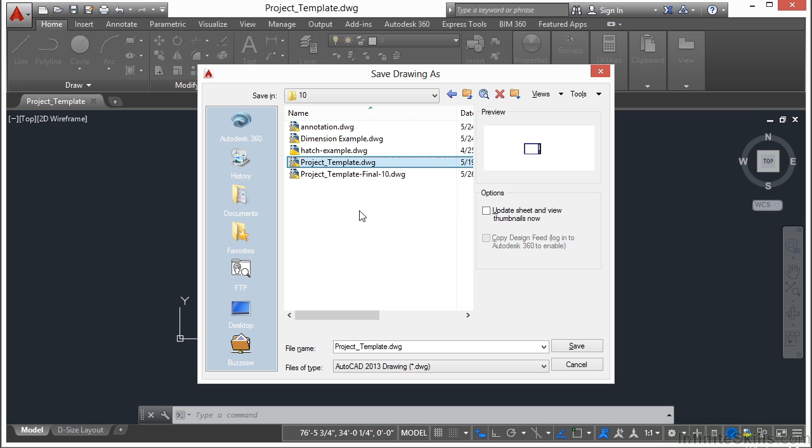So go to Open Files, browse to that folder, look for the project template file. Open it up. Now I'm going to do a Save As because I don't want to override that file. I'm going to override this file that I had started just to make sure I had everything going correctly. This will give you a fresh start, or the same start that I have when we begin our drawing.

If you open up the Layer Manager, you'll see that we have a bunch of layers in here, many of them which we had created ourselves or changed. Now what we need to do is make 3 text styles.

So type in the word style. We're going to make 3 of them: a notes, a header, and a title. Click on the New button, name this one Notes. Click OK. Now let's just go ahead and use the Arial font, regular. And we're going to set the text height to 1/8 of an inch. Let's leave everything else the same.

Click Apply. Now let's make another new one. Call this one Header. Again, we'll use the Arial font. I often use Arial in AutoCAD because it's very thick, it's blocky, makes it easy to read, and being able to read your drawings easily is a must.

A lot of times these drawings are in a machine shop or out in the field on a construction site. They get dirty, they get folded, they get ripped, and the easier the text is to read, the better. We're not looking to make beautiful works of art here. We're looking to make a tool, a guide to create something. So the creation process gets dirty and messy, and so will your drawings. I like the Arial font because of its simplicity and its blockiness. It makes it easy to see.

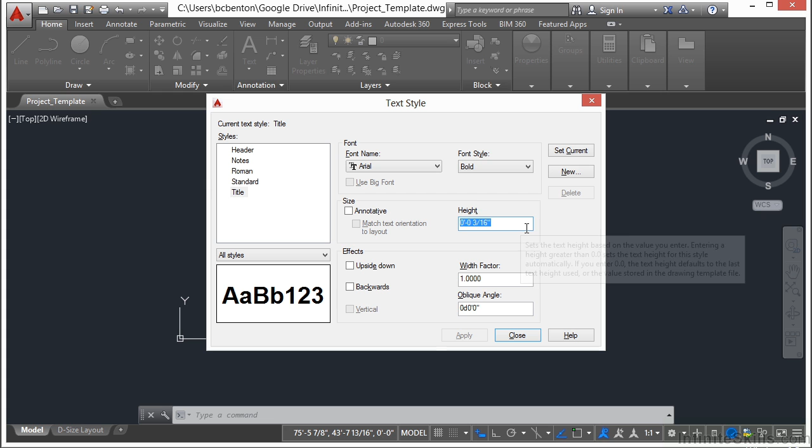Click on the New button, and let's call this one Title. Again, Arial and bold, and bigger still in size, a full 3/16 inch. Click Apply, and then click Close. So text styles are very easy to make.

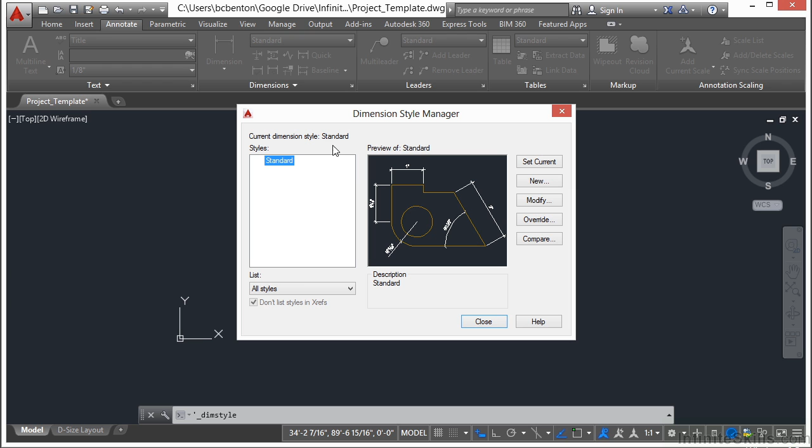Now let's make a dimension style suitable for an architectural drawing. Let's go to the Annotate tab, go to our dimensions, click on the flyout button here to get to our styles. There's only one in here, so we're going to make a new one. It's a copy of the standard, but we're going to call it Arch Project. Click Continue. Okay, we're going to do just a few things here.

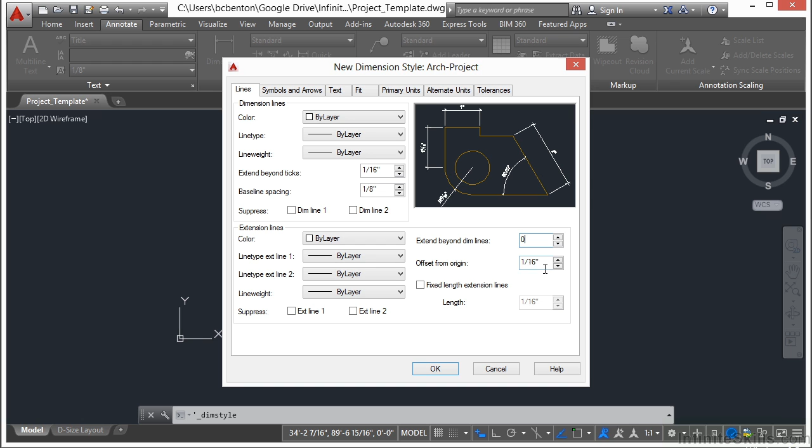We're going to go to the Lines tab. We're going to make everything by layer, same way with the colors of everything else down here, and the line type extensions, and the thickness. Now we're going to change this Extend Beyond Dimension Lines to 0. That's all we're going to do in this tab.

If we go to the Symbols and Arrows tab, make sure these are set to Architectural Tick. That's what I want to use. Everything else on standard should be fine. Now go to Text. On the text style, we're going to pick one of the new text styles we created called Notes. That way it'll match our font and height the way we want. I'm going to make the text color by layer. And that's it. Click OK.

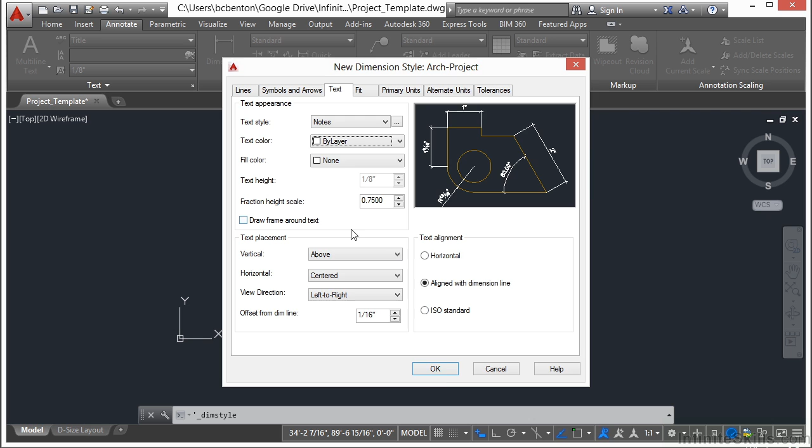Click Close, and then make sure you save your drawing. That's it, just a few tweaks to that dimension style, nothing crazy, and just a few text styles that we set up. Let's make sure that this Arch Project is our current dimension style, and that our Notes is the current text style. Now save your file. Every time you go to start a drawing, you'll have dimension styles, text styles, and layers already set up to make a good looking architectural drawing.